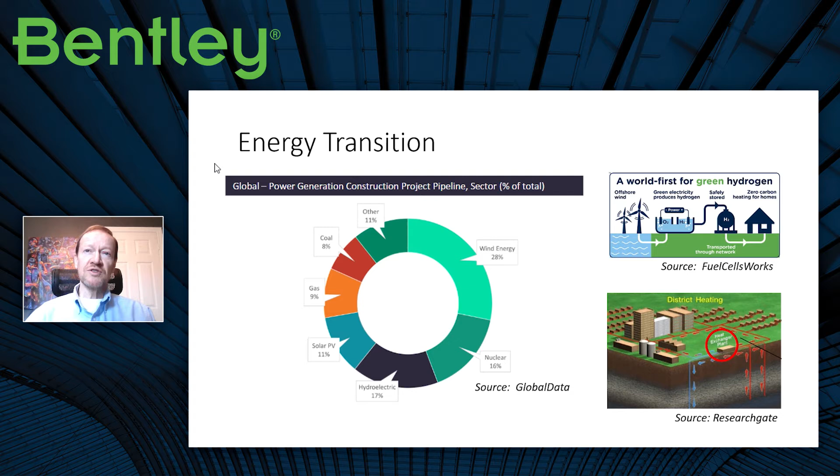But it's not just electricity. It's not just the electric environment that we need to make fit for purpose for this new world. We need to be able to provide energy from non-electric sources as well. Certainly green hydrogen, the ability to use hydrogen for applications like air travel, where battery storage just isn't practical. The ability to get heat from the earth and use that to heat homes and businesses through technologies like district heating. All of those are going to be sources of energy that are going to be carbon neutral in the future.

And so why would we look to traditional oil and gas companies to make this transition? Why wouldn't we just divert all of our capital to startups and the traditional electric industry? Well, our oil and gas companies have a number of key strengths that they've built over the years that are going to be critical for helping us make this transition to this new lower carbon world.

Oil and gas companies are deep with engineering expertise. They have lots of experience developing complex infrastructure, designing it, building it, operating it, and running the complicated construction projects to build that infrastructure.

Oil and gas organizations over the years have been forced to look farther and farther afield for those oil and gas resources, and so they've developed expertise in offshore platforms and deeper platforms in the offshore environment. And that expertise is going to be important when we move to a lower carbon world.

More and more of our wind generation, for example, will be through offshore wind turbines. And it's the same sort of issues that you've got to deal with whether it's an offshore wind turbine or whether it's an offshore oil platform. You need to understand the dynamics of the waves, you need to understand the dynamics of the wind, and you need to understand what's underneath the seabed and what you can anchor to, whether it's a fixed or a floating offshore wind farm that you're building.

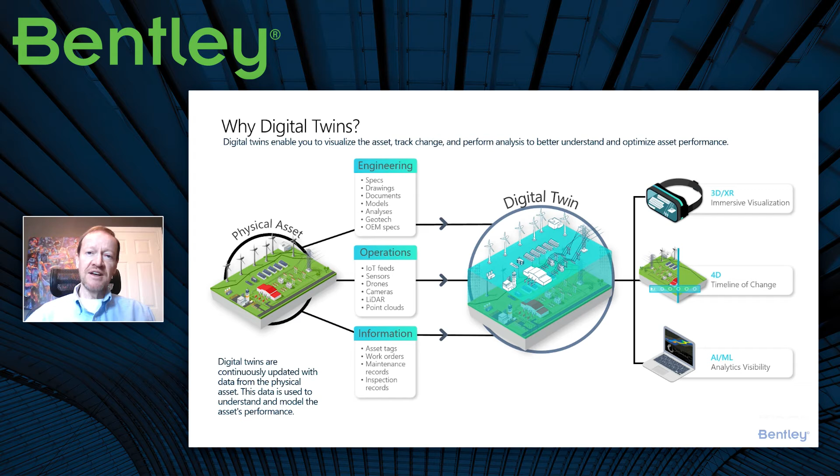Or if it's an IoT data stream, maybe you can use the historical information to trend that data stream forward using techniques like AI to extrapolate and predict what you think the future is going to look like. And then the real power comes from using that model to simulate different possible futures and come up with the best way of operating this asset and of maintaining it and ultimately replacing that asset.

When we think of digital twins, we don't think any one vendor is going to sell you your digital twin. The digital twin is going to be an ecosystem, and certainly our approach is a very open approach. We support all the major design formats, we support all the major CMS and IoT systems, and we've open sourced our underlying technology itself.

And we're very involved in international organizations like EPRI's Grid Model Data Management Initiative, which are all about ensuring that multiple vendors can communicate with each other and collaborate in providing owner-operators with true digital twins of the operating environment and the operating asset.

So let's take a look at how digital twins have been used in some specific examples. This one is a fairly traditional one, a traditional oil and gas use of a digital twin. It's Shell, who's using technology that Siemens and Bentley have developed, along with other players like FutureON, and they use it for assessing the ideal configuration of offshore oil platforms.

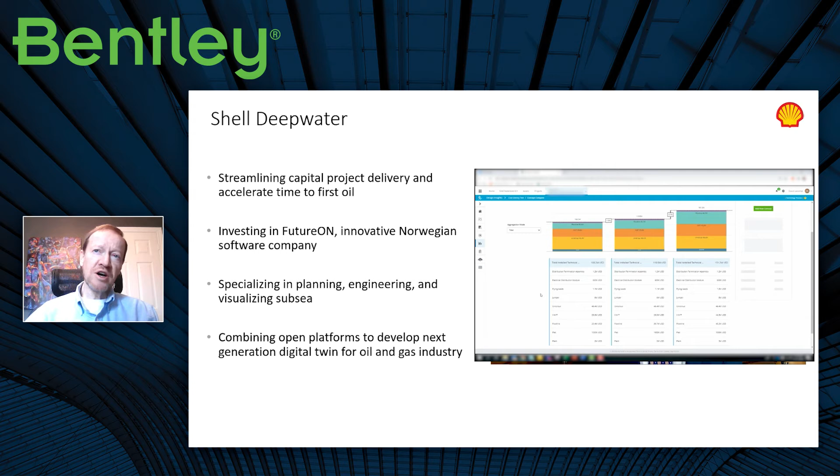So they've got multiple platforms, they've got an undersea seabed oil reservoir that they want to be able to extract the oil and gas from, and they can easily configure multiple different configurations, and then look at how those configurations compare, both from a cost perspective, a financial cost perspective, from an environmental perspective, and from a throughput and a benefit perspective.

So that's sort of a traditional oil and gas use case of applying a digital twin. And Shell is definitely thinking that many of the concepts that were developed in the creation of that twin can easily be used for, for example, offshore wind farms. So very similar problems to be solved: what should the configuration look like?

Where should the substations lie? Where are you going to put your cables? How long do the cables need to be? What's the optimal configuration? All of those sorts of questions are very similar for offshore wind farms.

In talking about offshore wind farms, it's not just about the design of those farms that you can use digital twins with. We worked with Microsoft and Doosan, who own a wind farm off the coast of South Korea, to develop a digital twin of the operating condition of their wind farm. And so we linked to all their IoT devices through Microsoft's Azure IoT, and surfaced that on top of the digital twin of the farm.

And Doosan's able to use that to get a real deep understanding of how their assets are operating, how they're trending over time, and what maintenance and operational tasks they might want to do to make sure that they're getting the throughput from this farm that they had originally planned.

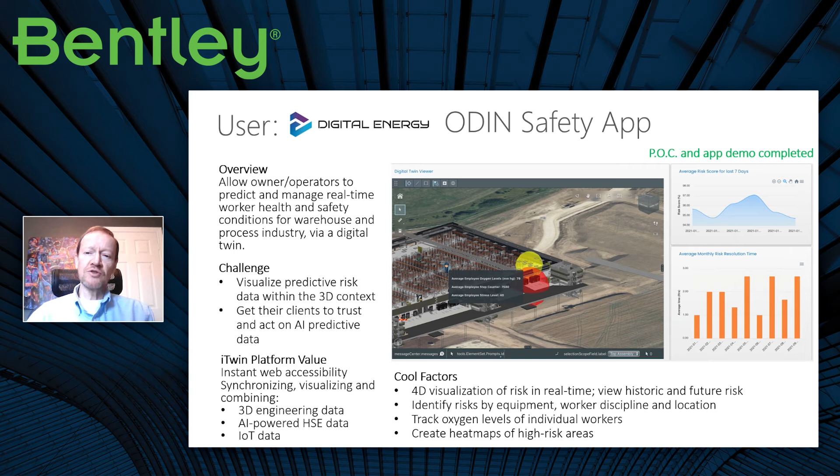And it's not just about throughput and finances. The digital twin can also be used for safety. Digital Energy, for example, is a company that's built a digital twin on our iTwin platform, and their digital twin is all about surfacing health and safety information on top of this model, then using advanced AI techniques to assess the risk of different areas of the physical plant and create heat maps showing where there are high risk areas based on historical incidents, and where health and safety professionals should be focusing to increase overall safety of the plant.

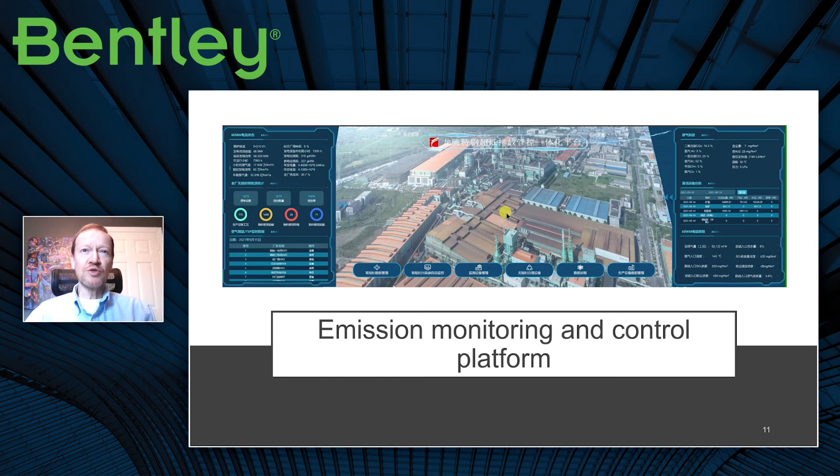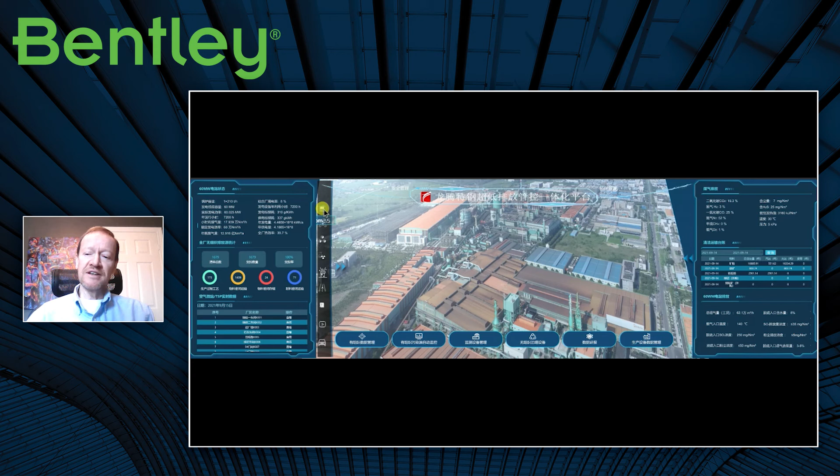And it's not just safety, it's environmental uses of the twin as well. This example is from China, where another company has built a digital twin on top of our platform, and they're using this to monitor the emissions coming from a plant. The same way you can use your digital twin to evaluate different ways of operating and the financial impact of those operations, you can also evaluate the carbon footprint impact and how different ways of operating or configuring your plant can contribute to different levels of a carbon footprint, and minimize that footprint.

In fact, one organization, One Click LCA, has built a specialized application - again, a digital twin-based application for doing carbon calculations. We're starting to see more standards developing for the best way of measuring carbon, evaluating your footprint, and then minimizing the carbon footprint.

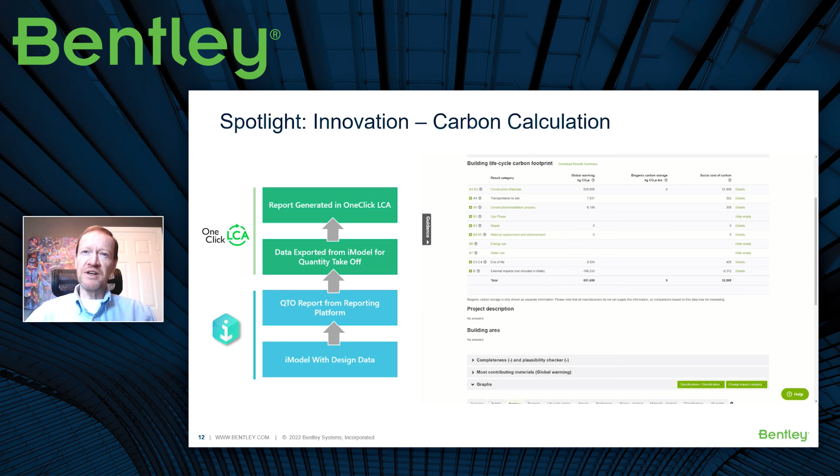In this example, through the construction of a building, they were assessing the materials being used and the processes being used in the construction to minimize the carbon footprint during construction. But then even after the facility or plant is built, you can continue to use these sorts of tools to assess the ongoing carbon footprint of these assets and how to minimize that.

So in conclusion, digital twins are a key technology that are going to help us make this transition to a lower carbon energy environment. They can be used for a variety of things, from optimizing your operations to maximizing asset life, to monitoring your carbon footprint. They can be used throughout the complete life cycle, from design through construction to operations and maintenance. And oil and gas companies have the skills to develop these digital twins and to leverage the technologies to drive engineering innovation, which is going to be critical for us to make this major transition.

And certainly, as said before, it's key that the architecture for these digital twins be an open architecture. It's likely going to be a multi-vendor environment - you're going to have different vendors who have different areas of expertise, and you're going to want to leverage all of that expertise in your digital twin solution. So as you're thinking about how to go down this road, be sure to look for vendors that take an open approach.